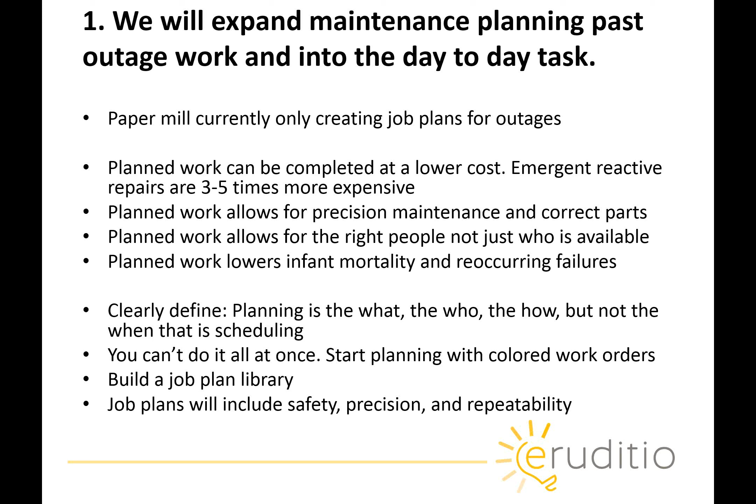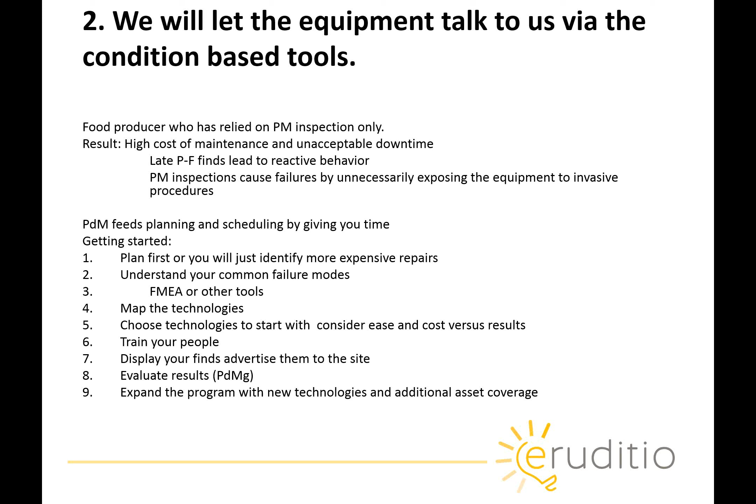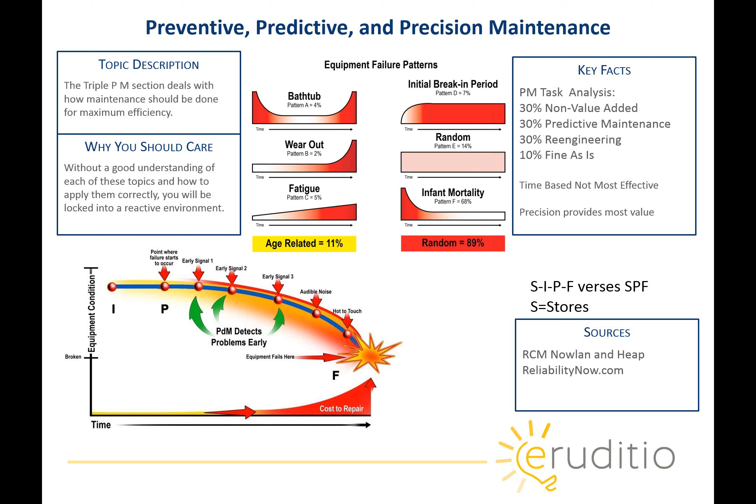So the third one we're going to talk about today is building our schedule 4 weeks in advance. And what I'm going to do is show you a quick video here that describes that process a little bit. Now, I am on a pretty slow internet connection, so there's a pretty good chance the voice won't be quite synced up. But when you view this on our website or within some of our modules, you can get a much better experience. But I definitely wanted you guys to be able to hear and see this concept of scheduling 4 weeks out in advance.

So there are a couple things you need, and for this one, this came from a plastic converting facility that wanted to lower their maintenance costs, and really and truly, they wanted less trauma with operations. It was very hard for them to get downtime that they needed to make the repairs that they knew the equipment needed. So what they were able to do was begin to build this schedule 4 weeks in advance. That gives operations a real good look at the downtime that's coming up, and it helped to build a better relationship between those 2 parts of the organization.

Now, a couple things you're going to need. If you want to build a schedule 4 weeks in advance, you've got to have the predictive technologies out there identifying failures early enough that you can put them out on the schedule for 4 weeks. That's a big driver to make this work correctly. The second thing is you've got to have good, accurate time estimates because we don't want to put something out there 4 weeks. Even though we may refine it as it gets closer, we want to make sure that we're not taking up too much time and really able to budget exactly what we need moving forward.

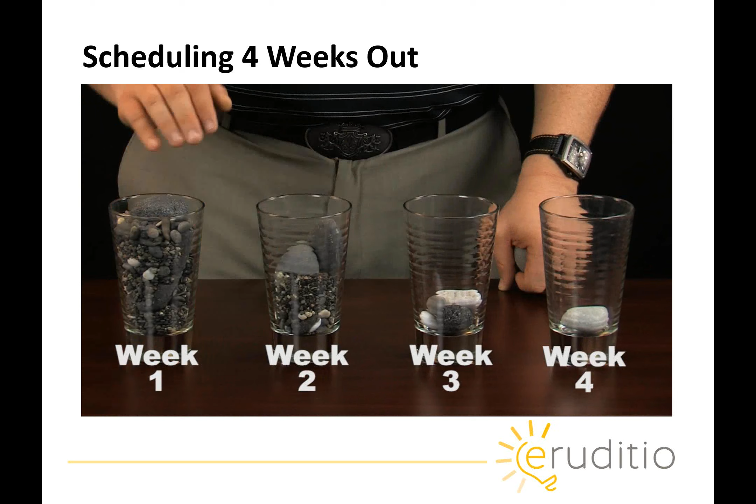What I'm going to talk about is how we take those jobs and we sequence them into the schedule 4 weeks in advance. So if we look down at our glasses, a couple things you see here. The first glass is a completely full schedule, or nearly full. And this represents next week's schedule. So we're going to move that over here in a few minutes, and we're going to execute that work. Now, at the 2-week out mark, you see this one isn't quite full yet. We've still got some room within the schedule. We'll be adding more jobs to it as it gets closer to the execution date. As we move out to the third glass here, the third glass has less rocks in it, but it still has a few jobs that we've put in there that we know are coming up, and we want to sequence those a little further out.

And then 4 weeks out, the last glass that you see here, you'll see that they have 1 or 2 jobs in there, not many there. The point is, as time goes on, this work will get executed, and then we'll come in and start to fill up the rest of this schedule, and that will become the schedule that gets executed the next week. And then as time goes on, this one will move down into that position as well.

The idea here is we're planning 4 weeks in advance. It gives us good visibility into the future. We know where those big jobs are going to be, and we can really plan for those jobs before they get to the point of execution. Okay, we talked a little bit about scheduling 4 weeks in advance. I'm going to stop it there, and this gets into a little bit more of the detail of how to plan within the week, but we'll save that one for another day.

So the next big idea or concept is problem solving. And problem solving is something that all of us say we want to do. I've never been into a facility that didn't say, yeah, we're working on it, we're trying to get better at it, but to be honest, very few really do it well.

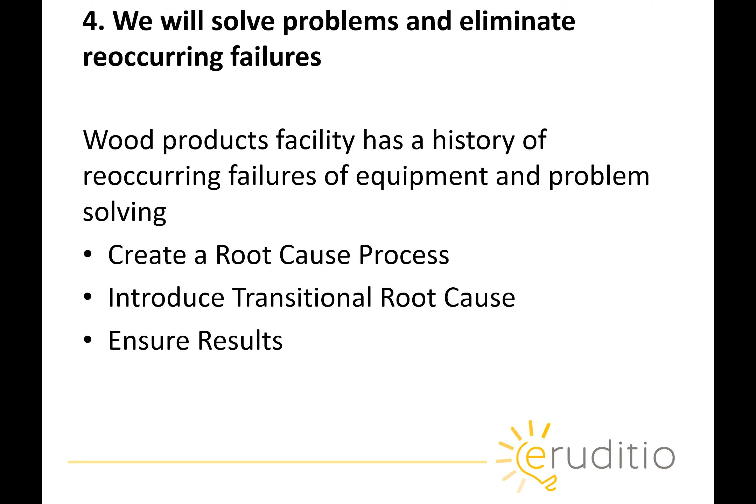So let's take a look at a couple of things here. First, this is one of those single point lessons. And I wanted to share this with you to let you see what we're talking about when we talk about transitional root cause. Now, many of you may have 5 whys within your organization, especially if you're using Lean or Six Sigma. And 5 whys, it is a tool that we use in the root cause world, but it doesn't always get us to the best root cause.

And then why did that happen? And then why did that happen? And why did that happen? It allows us to really begin to build a culture of root cause. All right? The problem is, and I'm going to flip back and talk about this, but the problem is if you've got multiple things going on within the facility or multiple things coming together to give you a problem, you're going to miss all but one causal chain.

So if you think about it, and I'll make this one really simple, if you think about fire, if we had a fire in our parts room, there are a couple things that had to occur for that fire to happen. The first thing that had to occur is there had to be an ignition source. The second thing that had to occur was there had to be some kind of a source of oxygen. The third thing that had to occur is we had to have fuel for that fire to burn on. So those are 3 things.

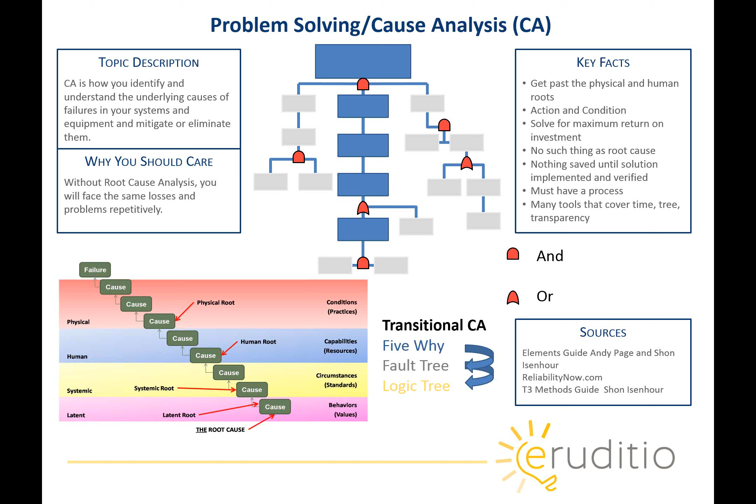We also talk about time as another element and how you can branch out on time and use that within an investigation. And then we also talk about using FMEA tools and some of those more complex tools to allow us to really look into a problem and understand the more complex, bigger problems. If you want to learn more about it, reach out to me and we'll talk more. I love sharing it, and it's a big part of fixing a lot of facilities.

So the 5th one we're going to talk about today is best practices, or the way we convey knowledge to the organization.

A pharmaceutical company came to us, and they're really struggling with getting reliability out to their organization. They've put people through training. They've put people through RCM training and RCA training. They've put people through reliability training and planning and scheduling. But unfortunately, they either don't use it enough or they have forgotten by the time that they need to use it, then they're just not getting the results that they need.

So what we were able to do is we were able to put together a system for them that includes both the face-to-face training but also e-learning. And that e-learning allows them to then go through and apply each of those things in that e-learning environment before going out and doing it in the real world.

When they do it in the real world, our project coaches work with them to make sure they're applying each of the tools correctly. Maybe they're using one of those root cause tools we just saw, so they show us that fault tree and we say, okay, good, did you think about this? Did you put these things into place? So we're coaching them through, giving them that thorough understanding of how to use this going forward.

And then we use videos and toolbox topics and that sort of thing to reinforce it. We have a series of sustaining skills videos that they're using, so when they get ready to go do a root cause investigation or an RCM analysis, they can quickly go through those videos on demand, take a look at them, feel comfortable that they're now ready to get out in front of a group of their peers and do that RCA or do that RCM.

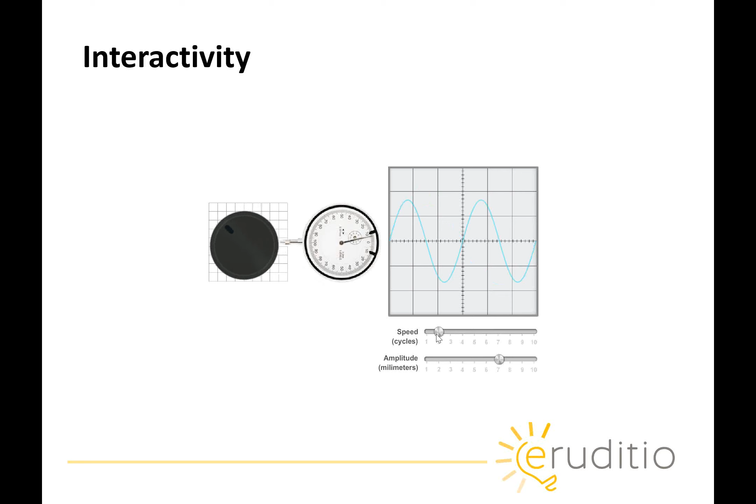And you'll see me moving the speed knob down at the bottom of the screen. And as I move that speed, you can see there is a shaft, and that shaft is speeding up. So I can begin to see what's going on. I can begin to really understand a concept that would be a little harder to see out in the real world. So when that shaft, which happens to be out of alignment, rotates faster and faster, I can see what that does to the dial indicator. And then if you look a little further over, I can see what's happening on the chart recorder that shows me that time waveform or what's actually happening.

So we would use this to help people understand vibration. But we can also use it to show someone what happens when you align that shaft. So if you think about how much energy is in that spectrum or in that time waveform right now, you can see there's a lot going on. There's a lot of movement. But by simply aligning that shaft, and you'll see me moving it down there, you can see how much energy is taken out of that system. Now I can understand why aligning that shaft is important, because I've taken a lot of that energy out of the system, and that energy is what's trying to tear that piece of equipment apart day in and day out. So we use a lot of these simulations.

You may be able to do the same thing within your organization. They don't have to all be in e-learning applications. You may be able to build some of them out of scraps laying around the shop. But give them a place to really begin to understand that concept before they have to go out in the real world and talk and convey it.

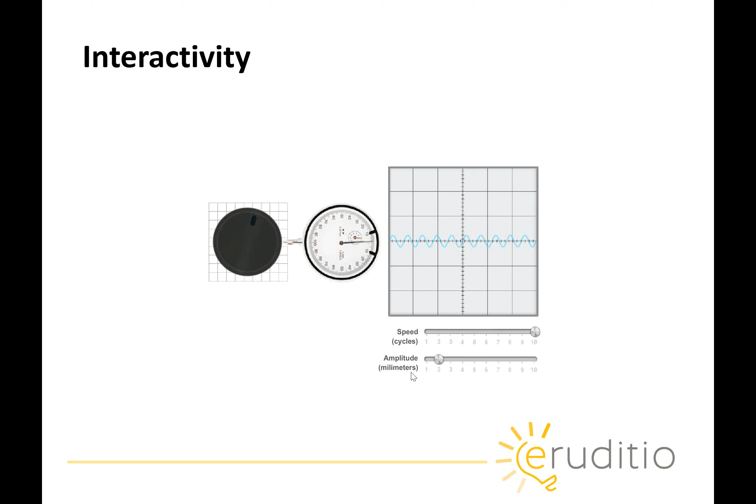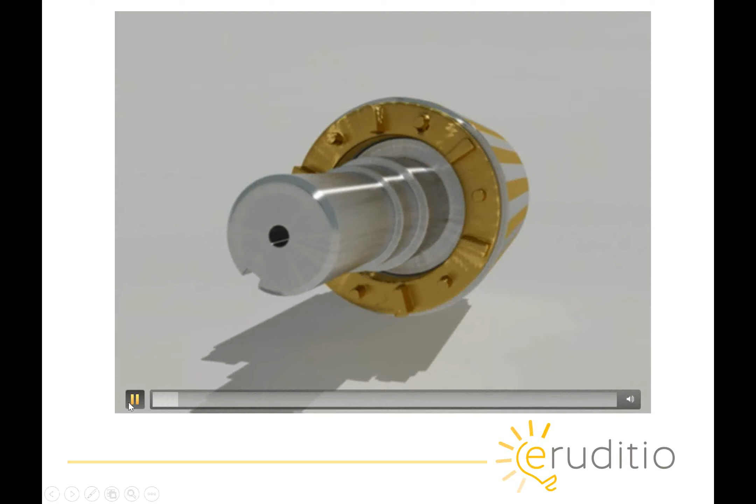Here's another example. We're finding more and more a lot of folks don't understand machinery dynamics because they haven't been introduced to it. Maybe they're coming out of college, they've got a great understanding of computers and some of those things, but they really don't understand what makes a motor work. So we build in a lot of animations to ours. This happens to be a motor, and you can see the poles appearing. And now you see the casing, and now it's all coming together, and I can begin to see how that unloaded motor works.

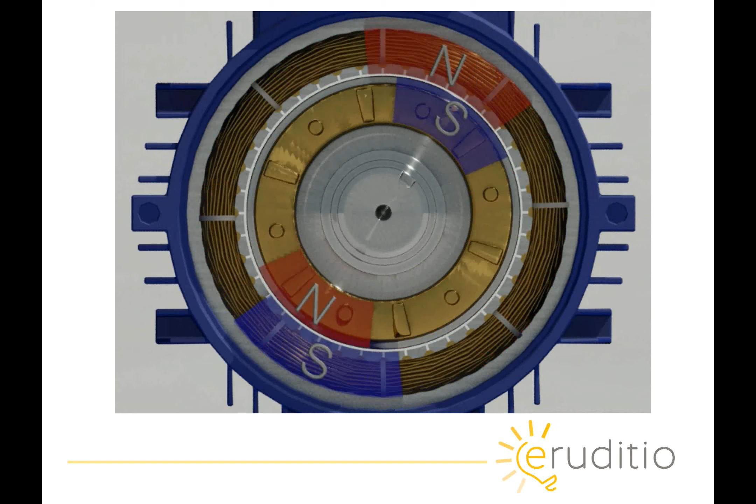See if you can find models for common things within your facility where people can see views or see into things that they wouldn't normally be able to see. Because if you don't understand all the different parts, the stator, the rotor, all the things that are inside the motor, then how are you going to understand why it shorts out or why a rotor bar broke or cracked or loose is a problem if you don't really know what's going on in there? So these can be very powerful for you as you move forward.

We also use variable paths in our e-learning, and I think you would definitely want to do the same because not everybody in your organization has the same level of understanding about all the topics. So some folks may have a good understanding, others may need more detail. We do that through these branching scenarios. So based on the answer that they select, they're sent down different paths where they'll learn more detail if they show that they don't understand the topic, or they'll get less detail if they do understand the topic.

The idea here is that when we want everybody to go through the training, we don't want people testing out because we want to make sure when they come out the other end they're all using the same processes and the same language and they can talk to each other, whether they went through the full training or the lesser level based on their maturity.

So the sixth topic we're going to talk about today is capturing data within your CMMS. And really this is one of those that you just have to do. There's not an easy way to do it. There's not a silver bullet. There's not something I can give you today that's just going to fix all your woes in the CMMS category. But the things to think about is, do you have a functional hierarchy?